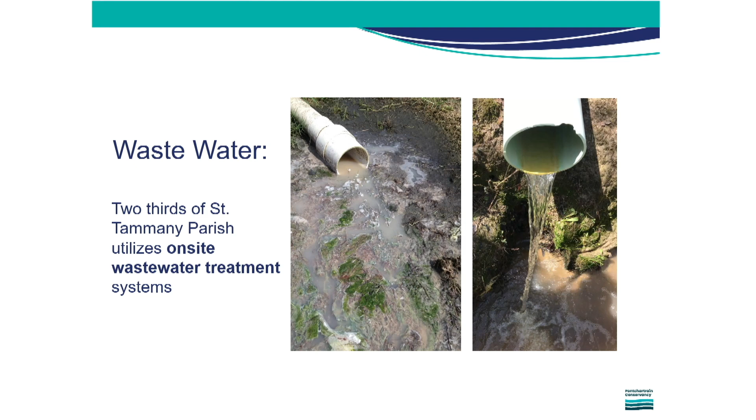So as you can see and may have seen in other presentations, 2/3 of St. Tammany Parish utilizes on-site wastewater treatment systems. And we have a program where we do inspections of these systems. We provide assistance to homeowners. We collect a lot of data on these systems, ultimately for the improvement of waterways and a reduction in non-point source pollution. You can see here a photograph of one of our staff helping a homeowner with their particular system.

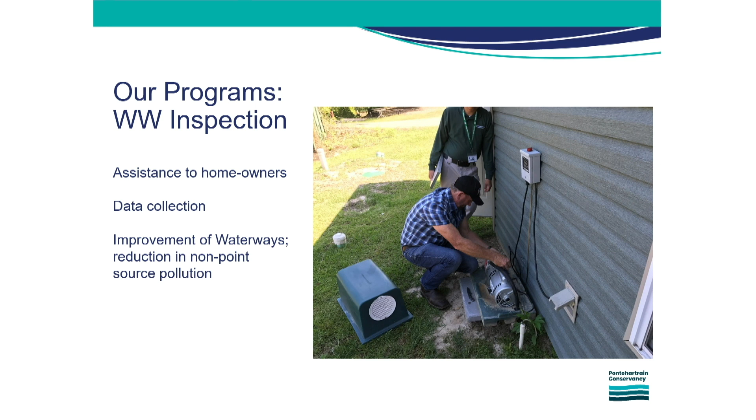So why is this important? Waters are impaired. Again, as you may have seen in some previous presentations, some waterways are limited, and if a waterway is deemed impaired by a state or federal agency, that does limit development and economic improvement in the area, because no permits can then be issued on that particular waterway for additional discharge. Thus, if a new business is being proposed and needs to discharge treated wastewater to that waterway, if there's an impairment, there's a possibility no permit could be issued. Thus, the facility or business would not be able to operate.

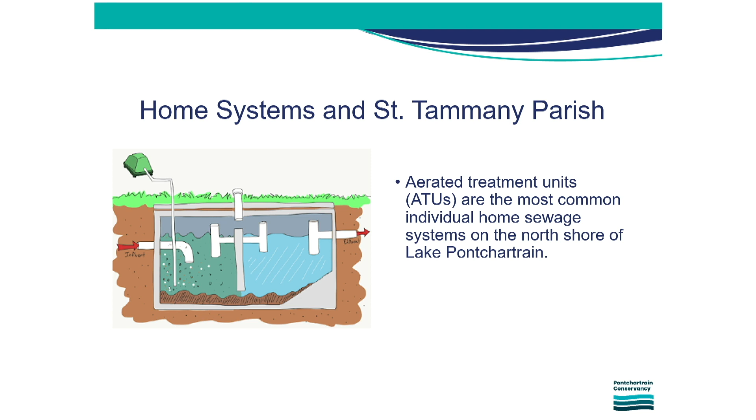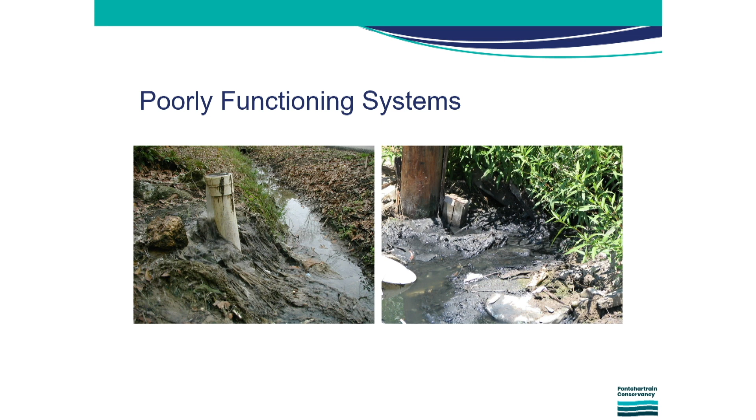So home systems within St. Tammany Parish, most of what we see throughout the parish are ATUs, or aerated treatment units. That's the most common type of home sewage systems that we see along the north shore of Lake Pontchartrain. But in our inspections, we see a lot of those systems that function quite poorly. So we have some pictures here that are demonstrating some things we've seen here in St. Tammany just from our visual inspections of particular homes.

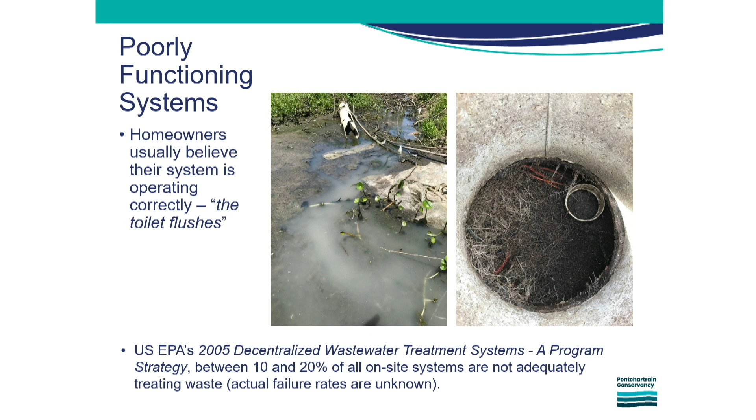And a homeowner may think that their system is functioning properly because the toilet flushes, as we can see here on this particular slide, but the reality is, going out and inspecting the actual system, it may or may not be functioning properly. We have heard from EPA that across the country, 10 to 20% of systems may not be functioning properly, and that's across the country. But in St. Tammany Parish, we see actually a lot higher percentage of systems that are not functioning properly.

And why is that? Variety of different causes. Could be that a heavy vehicle drove over the system and caused some damage that may or may not be visible to the particular homeowner, trees or shrubs that grow into the system, solids that have built up and maintenance hasn't been performed, perhaps there's an electrical fault, the broken aerator or broken diaphragm, the tank has settled just due to subsidence in the yard if the ground has sunk.

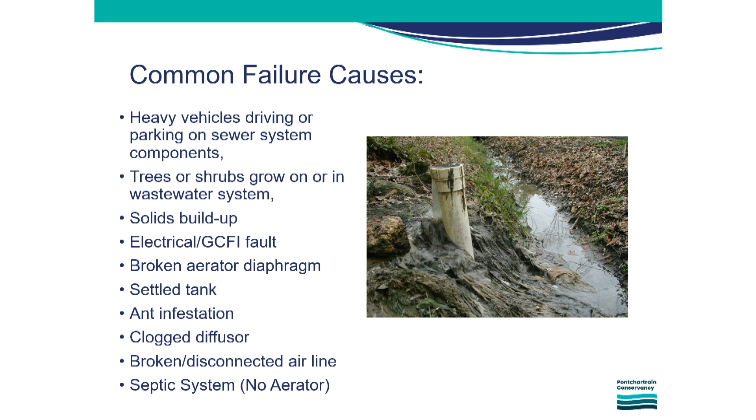Ant piles are another thing that we typically see sometimes growing in systems and thus allowing the system to not function properly. A clogged diffuser, a broken or disconnected air line, and then for septic systems, those do not have an aerator, but they also require a different type of maintenance. So with our home inspection programs, we go around to ATUs, we collect information on the size, the type, the make, and the condition of each particular system.

We work really closely with the parish as well as the mosquito abatement district on this. And when our unit is reported as non-functioning, our inspector notes which components have failed and need to be repaired. A re-inspection is then typically conducted 30 days later.

We are a nonprofit. We are not an enforcement agency. We do all of this in service to the homeowner to try to help them get their systems functioning properly. We provide information about the functionality of the system to the homeowner, and we also provide them information about financial assistance, which typically the parish has some resources to help with financial assistance if one qualifies for that.

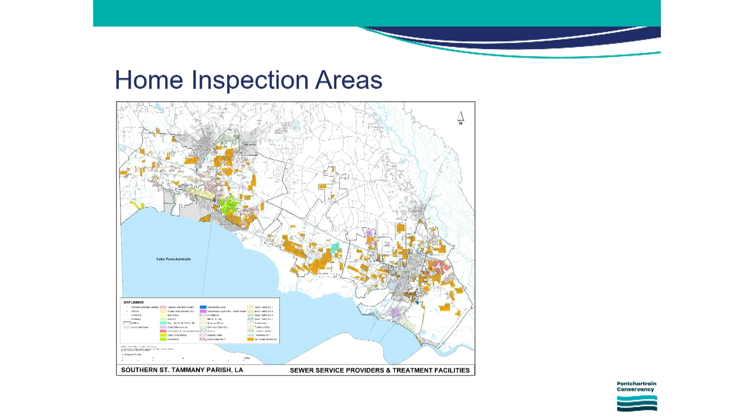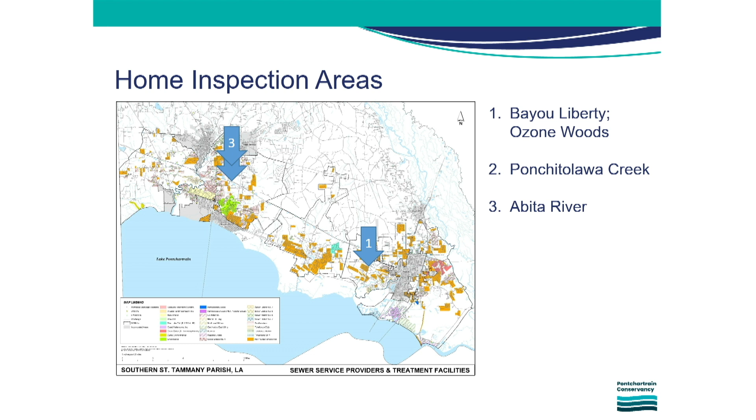So looking at a map of the areas where we have done some of our home inspections, we worked around Bayou Liberty in the Ozone Woods neighborhood, around Ponchitolawa Creek, and the Abita River, as well as the Bogue Falaya. These are some areas that we have worked in, also Bayou Lacombe throughout the parish, where we have done inspections of particular neighborhoods draining into those waterways.

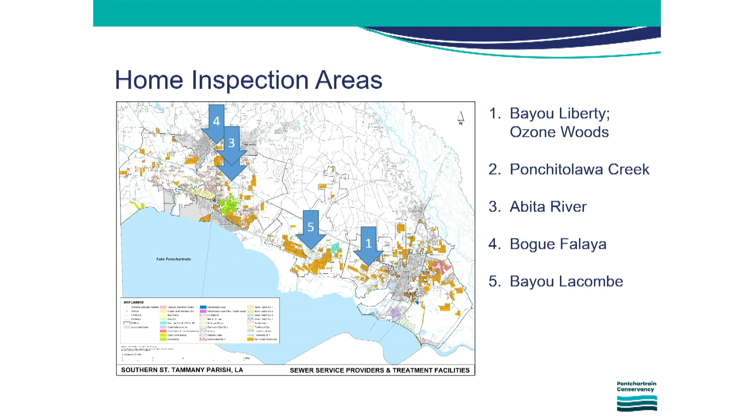And these successes are measurable. So you can see a statistical chart here of one particular component that we sampled for, biological oxygen demand, before when we did our first round of inspections, and then 30 days later, after we had a chance to talk with the homeowner about ways to get their systems functioning properly again, the results we saw after that were remarkable.

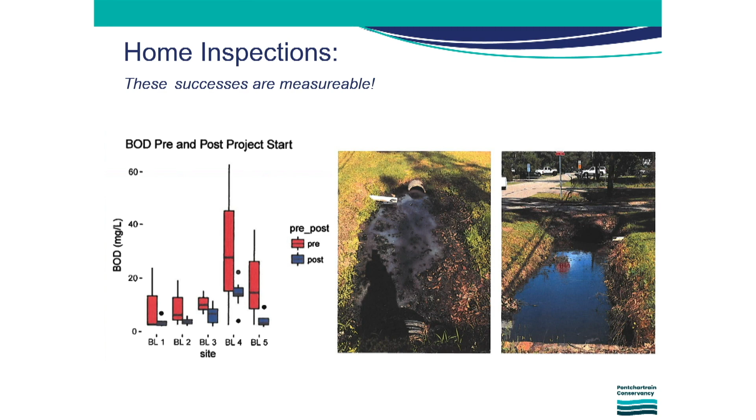In Bayou Liberty, we saw wastewater markers of pollution, including BOD, which is an oxygen-demanding substance. And you can see this on sites Bayou Liberty 4 and Bayou Liberty 5, but you can also smell those improvements. The overpowering odor is gone, and the mosquito fish return to the cleaner water after the program. So again, just in working with homeowners on their particular systems and getting them functioning properly, we have seen remarkable improvements in the quality of the water where these things are discharging.

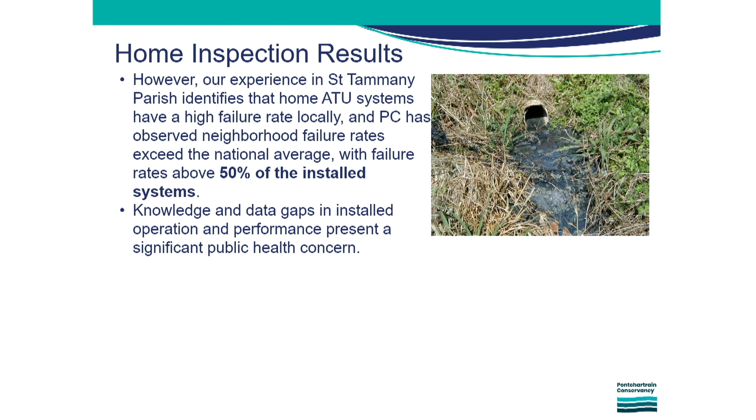Our experience in St. Tammany identifies that home ATU systems have a high failure rate. We've observed some neighborhood failure rates with 50% failure just in our first pass inspection. For nearly 4,000 homes, we've seen a 1 in 2 failure rate through our experience in working with the parish. Knowledge and data gaps in installed operation and performance present a significant public health concern. So again, you can see some of the failure rates that we've seen, sometimes up into the 60 percentile range.

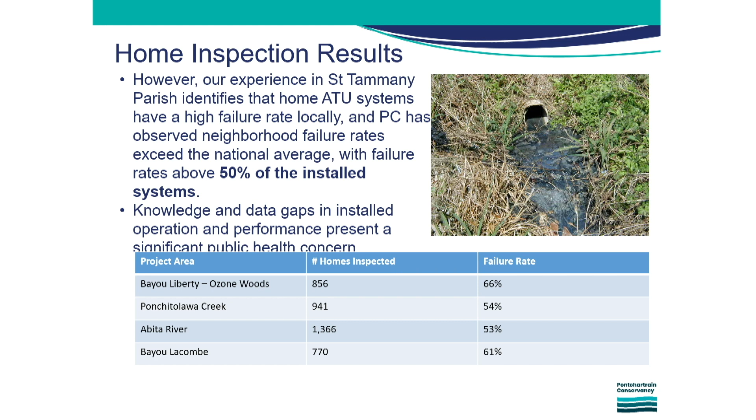But success is not static. Our program is grant-based, and we need new funding sources to reach new areas. An area with a program can backslide if it's not continuously inspected and maintained. For example, around the Abita River, we performed over 1,300 initial home inspections and 1,800 follow-ups with our re-inspections, and when we went back, there was a 50% failure rate even after that.

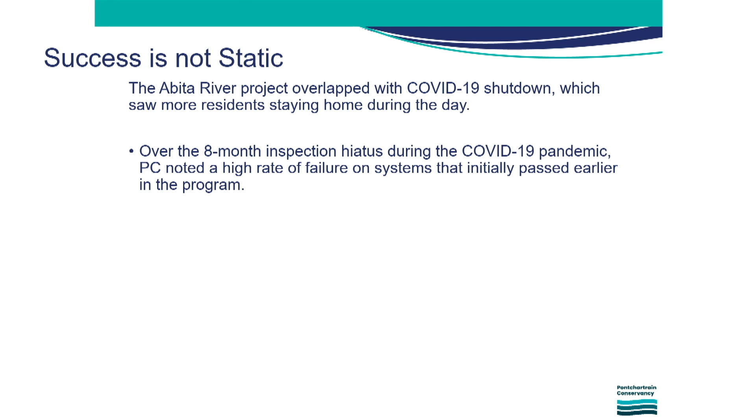Namely, there were 100 plus inspections that we performed after we were allowed to resume inspections after COVID. These homes had previously passed, but after the COVID shutdown, nearly a third of them fell into a state of disrepair. Because residents were staying home all day, there was more water usage at the house. Over that 8-month inspection hiatus during the COVID-19 pandemic, we had a high failure rate of systems that initially had passed earlier in the program. But when our inspections resumed, we started going through, checking out the homes, and again, educating homeowners.

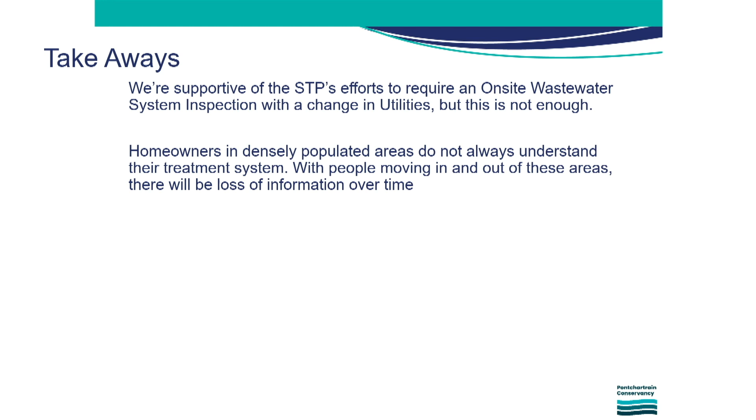So what are some takeaways of this presentation? We are supportive of the parish's efforts to require an on-site wastewater system inspection with the change in the utilities, but we recognize this is not enough. Homeowners in densely populated areas do not always understand their treatment system. With people moving in and out of these areas, there will be a loss of information over time. We're supportive of the parish's effort to continue improvement in areas that utilize on-site wastewater systems.